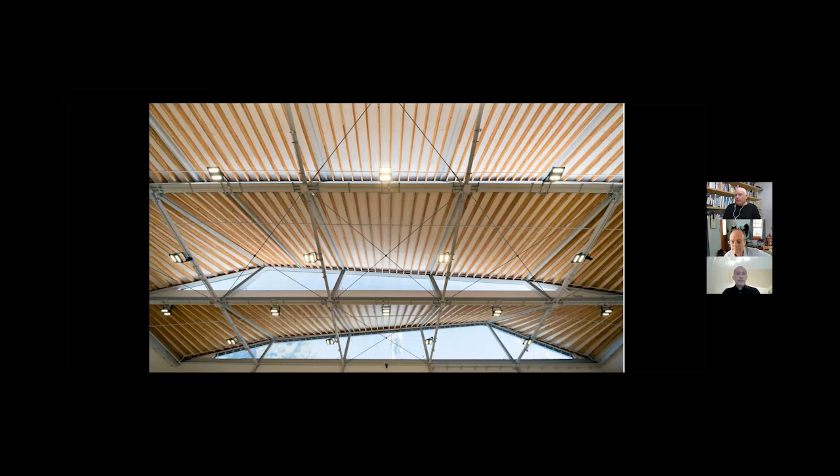We really wanted to absolutely limit the operational requirements for energy to use the building. So you can see these vaults change continuously. It was really important for us to make those out of shaped timber elements. And you can see that in order to contact the top surfaces of each of these joists, it implied a constantly varying curve.

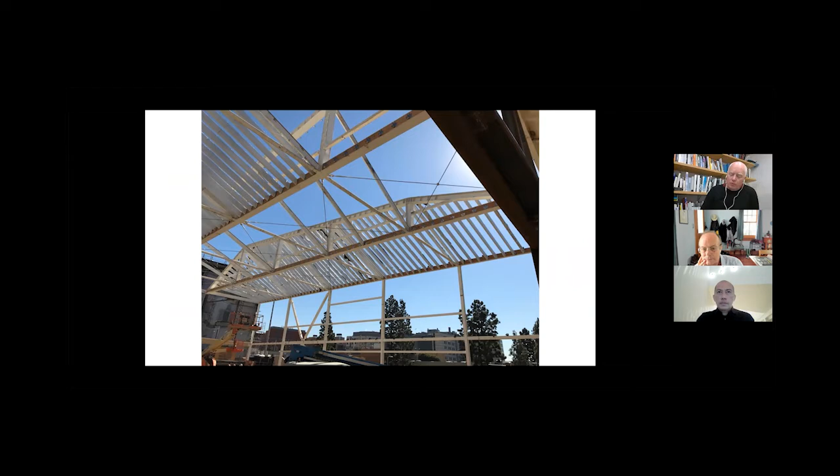And as we started to develop the project, you can see this under construction here, long steel trusses, wood glulam joists that connected them. And I think the thing that for us was interesting, and it was a reminder that in the United States, I think our default technology is carpentry, as opposed to building systems that are fundamentally masonry systems or fundamentally other kinds of systems. I think our default goes back to that Home Depot.

And the skills and capacity that carpentry brings to our work, and the problem solving that goes into any kind of architectural work, I think is really significant. So on one side of the image is engineering details. Thornton Tomasetti did a fantastic job on this project.

On the other side is the whiteboard that, as we went to the job meetings, the subcontractors were really starting to figure out what is going to be involved in making this vault hit the top surface of all these joists throughout the changing course of the vault in its implementation. So let's see here.

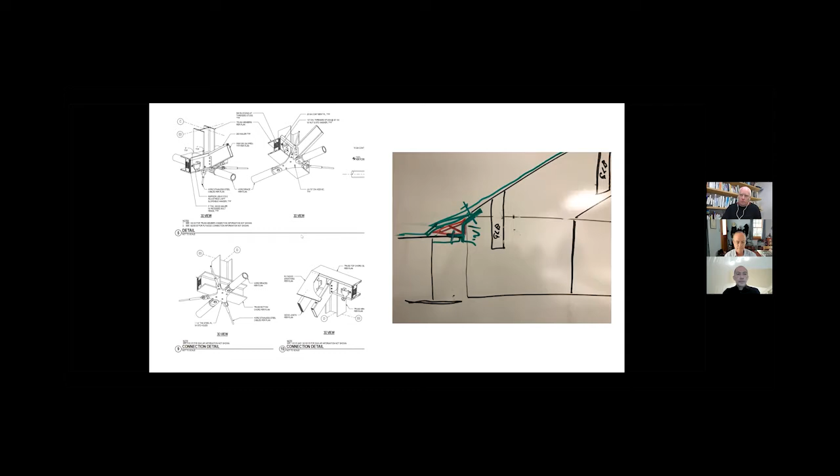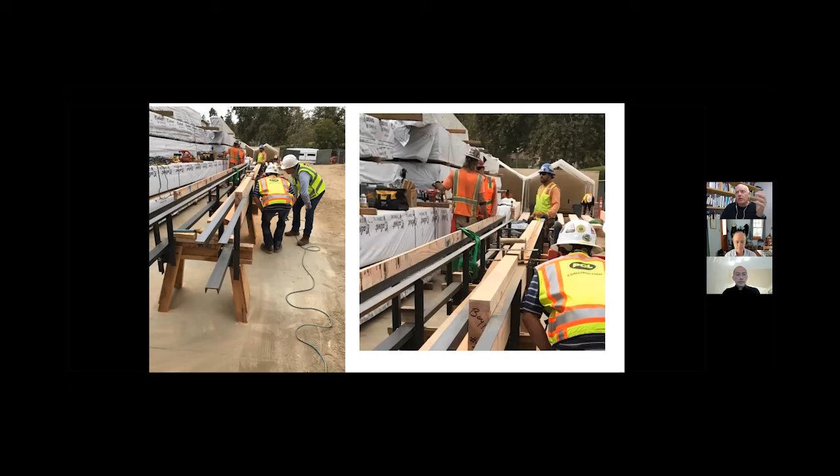So here is the carpenter side of the yard, and I really liked these two images because there was this gap that we tolerated in the start of this project, and that gap really was about the change between the idealization of this and the actual implementation of getting a curved plywood surface onto these joists. And you can see here, these guys are taking a closer look at this tool setup. So there's two things I'd like to point out.

So what the carpenters came up with was a variable jig in order to create this constantly changing top surface on these joists. And you can see in the lower right-hand corner, these bolts allow those two steel angles to change in their orientation with respect to that joist, and allow a slightly varying angle to be cut onto the top of that joist.

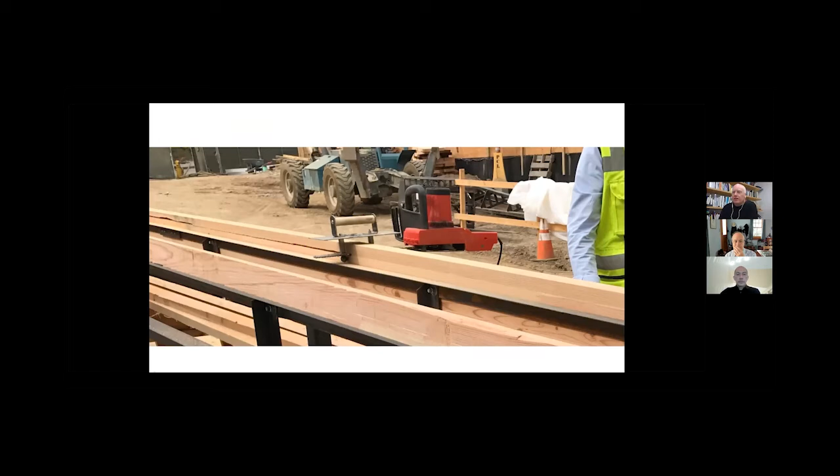And you can see here this red, so here's the adjustability. You can see those two rails operate independently. And here, I really like this thing because what it looks like they did was buy an electric chainsaw at like Lowe's, fitted it with a concrete trowel on the top and bolted it to the bar of the chainsaw, and then let that chainsaw run along those angles.

And you can see this cut starting to happen here, and then that was just cleaned with an electric hand plane. And basically, what we had done was we had extracted an Excel sheet from our documents showing the length and the nature of that taper, and they found a way to provide an analog alternative to that. Even though each of those joists changes really substantially, they developed a jig and a mechanism for allowing that to be fabricated with a single technique.

And I think that's the presence of carpentry within our own construction systems that ended up being a real factor in how we executed this building. So it goes back to this notion of technique as the fundamental source of momentum in construction.

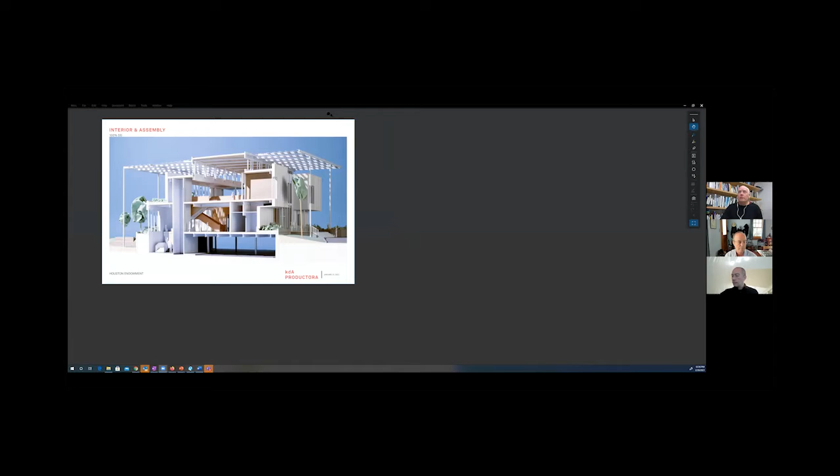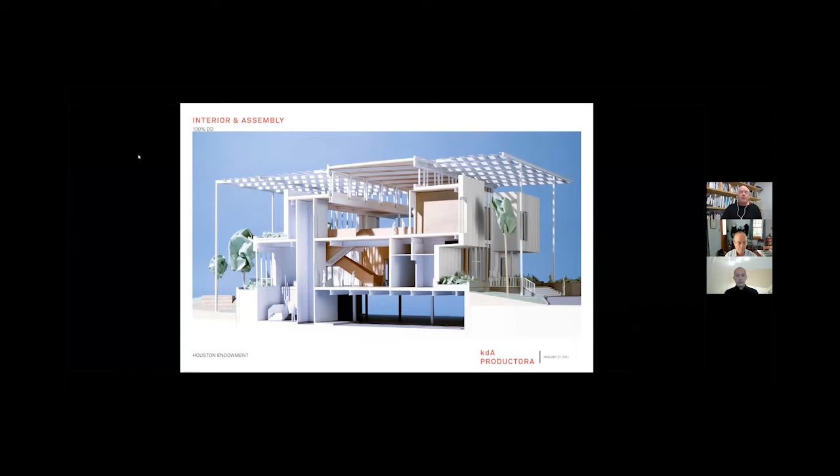So let me see here. Let me go to this second document here. And this is a project that we are just in the process of designing. It's a foundation in Houston, and this project is a competition we're working on with this firm Productora in Mexico City. It started as a concrete building in Houston, and

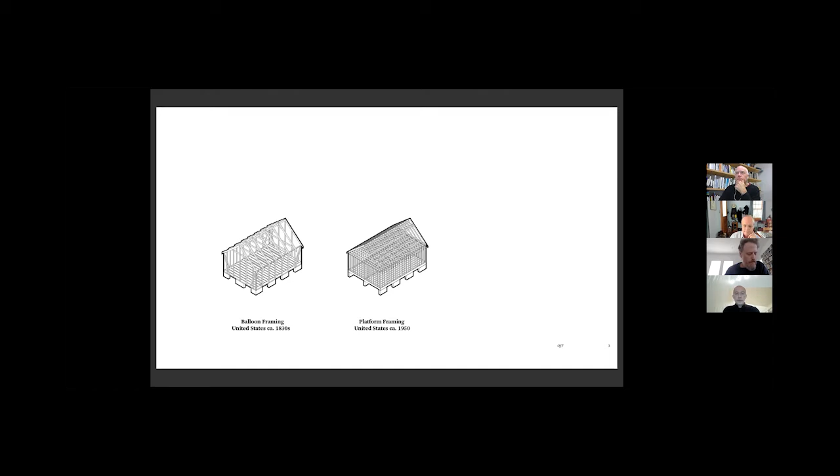Nevertheless, we found within this type there are certain material conventions that we've been able to use to explore important architectural conditions. Our favorite these days is the engineered truss. Nearly ubiquitous in residential and commercial construction, it is surprisingly adaptive when pressed. Two projects of ours look at its malleability as a basis for exploring the conventions around exterior-interior logics, and with that, a more general critique of architectural form. So here's your builder's guide if you're ever interested.

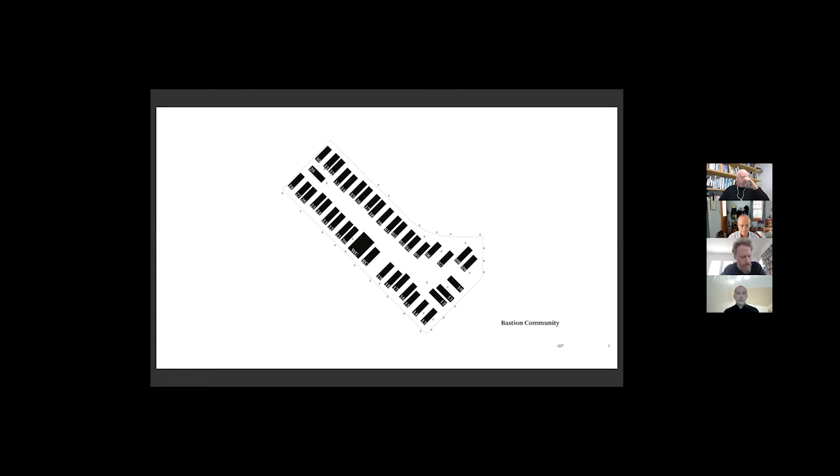The first project I'll start with is Bastion Community. It's a multi-unit affordable housing development comprised of two-family dwellings. There are about 80 units of housing and over 40 individual structures. The architectural premise in this case was to advantage a rigorous adherence to a consistent form. In other words, it's the same building multiplied over and over again. This was, of course, a way to keep costs down.

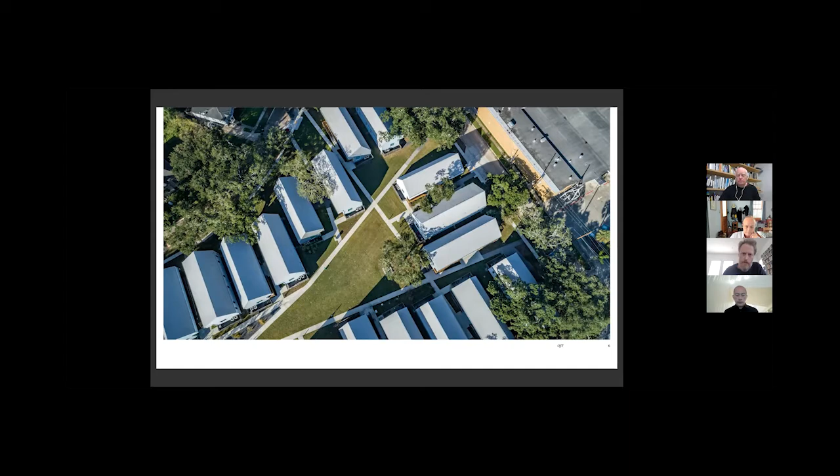But given that there were multiples to work with, we used that to advantage, through manipulation of the site configuration, creating meaningful spatial relationships, defining unit clusters, and specifically scaled social zones. So the real work was how these things were located next to one another. But more important to this conversation is how this attitude extended to the sectional conditions of the units themselves. By modifying the bottom chord of the truss, we were able to create numerous spatial conditions within the unit. Although any two were alike, no two were identical.

So again, it is sort of a poor man's version of manipulating traditional systems that we were impelled to work with here through cost-saving measures, but that's the nature, or as I say, the idiom of this particular construction type. In each of these buildings, we had unique under-chord conditions, basically different room volumes throughout the length of the building itself.

So we were able to add diversity within the structure through the simple manipulation of the truss form. Anyone who's worked with engineered trusses knows the manufacturer doesn't really care what shape it is. They just want it to work structurally. If you understand that as a precondition, then it's just up to your imagination to work through and make use of it.

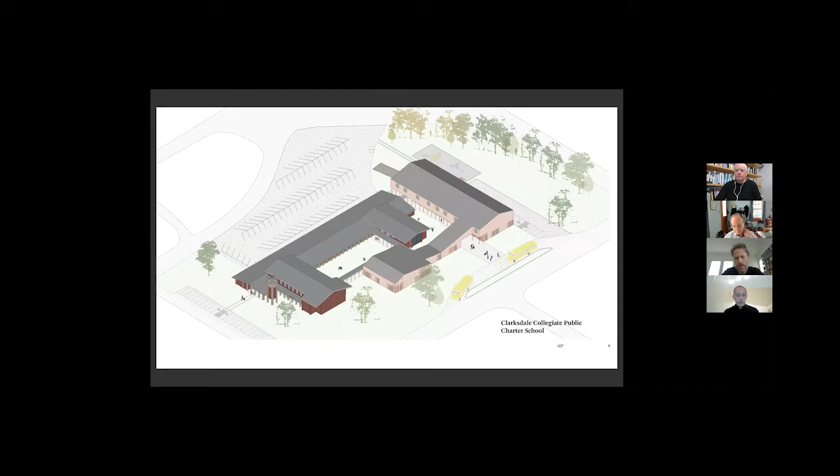A second project to walk through quickly was a school we've been working on in Clarksdale, Mississippi, that involved an existing church and the construction of a new building adjacent to it. It's an addition, but it's unattached. We needed to work the new building with the massing and form of the existing building so that the two intermingled, by client directive, so that we could respect the existing structure. It had its own monumental spaces that we wanted to make sure were still present, and the school itself had its own monumental spaces that needed to interweave with that.

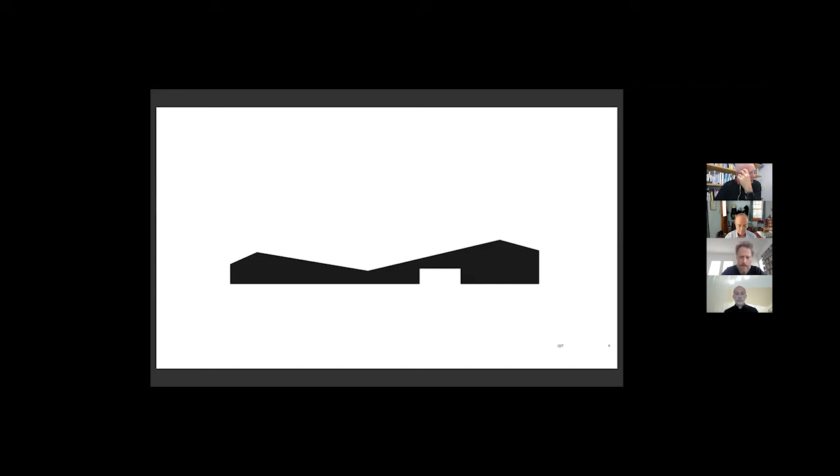So in this case, what we ended up with was creating this kind of clear silhouette that intended to obscure the scale of the structure using a playful, intentionally slopey and residential overall form. But behind that silhouette was a complex of rooms, each with specific spatial necessities.

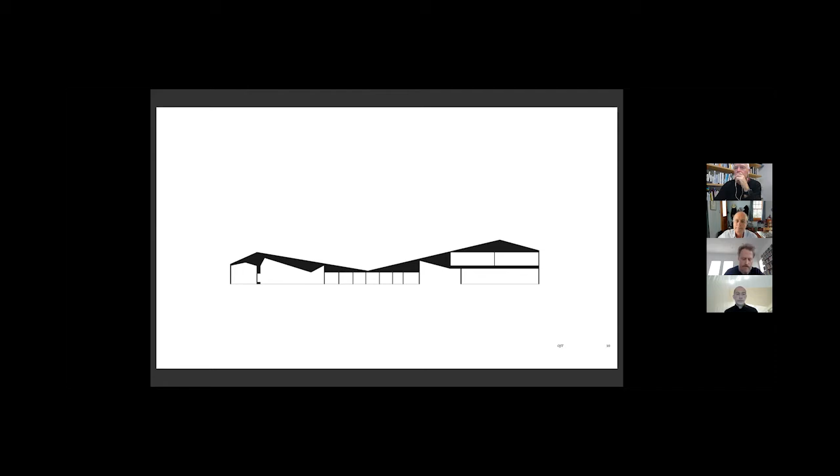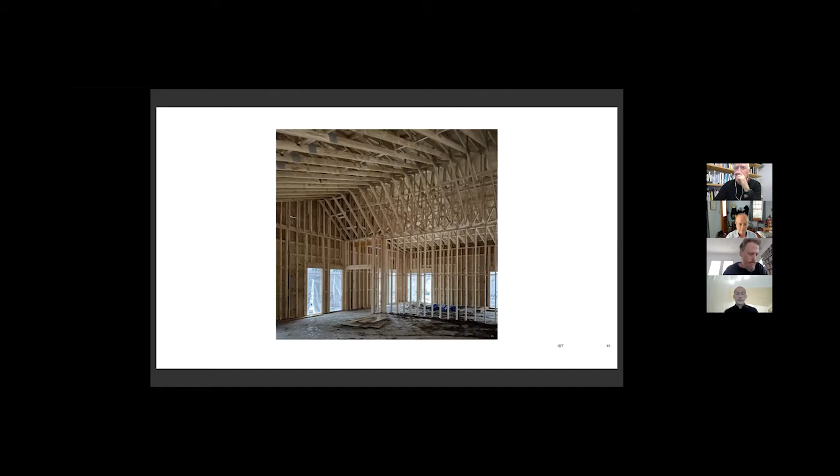And so this is it under construction, and I think we all as architects appreciate the sort of repetition and the character and depth that we get whenever we're on these job sites around this condition. And so this one, again, expressive of that particular form. But back to the idea of conventional framing.

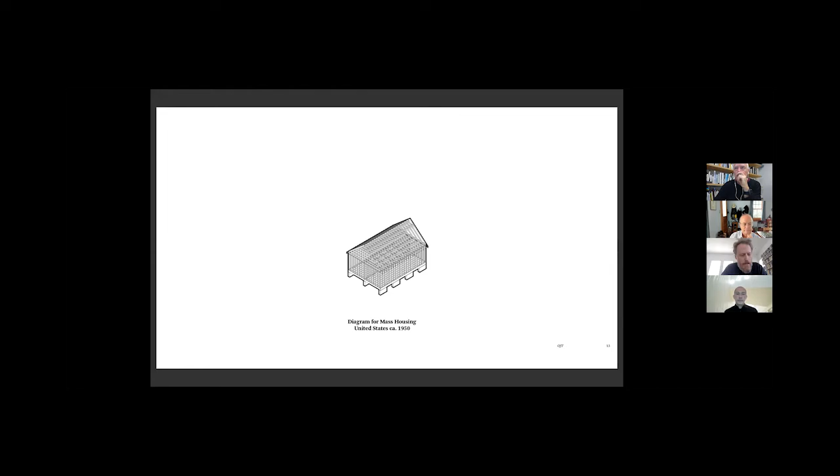The modernization of framing technique was also importantly a prerequisite for the mass construction of post-war housing. So the idea of platform framing came about at the time that we've had a post-war boom and consequently suburbanization of housing in America. And another construction type used for mass housing predated this and should also be a familiar typology to the audience. In this case, the concrete or commercial construction for your typical multifamily housing developments.

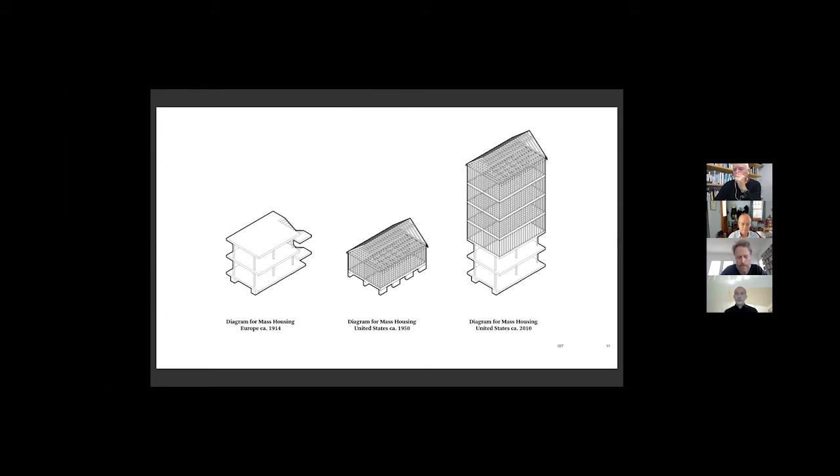But recently, what's of great interest to our office is how the melding of these two has created, in our opinion, the most nefarious typology for housing today. There's a lot to dissect here and no time to do it, but in the context of construction type and the use or advanced use of wood, I think what we refer to as the 4/2 typology deserves consideration. And by this, we say pound over pound, but it's number over number, 4/2.

And what that is essentially is the advent of incongruity of the building code, allowing the combination of non-combustible, that is the plinth, with combustible framing, which is the stick-built part, that creates this new housing typology. And there's a fascinating history here in which it evolved out of the Northeast, making its way into the international building codes. But along the way, at least in our experience, it's been firmly rooted in the lexicon of most developer and real estate entities in the country.

And this is what we're talking about, typical plinth in this case, where you might have parking or commercial on the ground floor, and then your double loaded housing units on the top floor. But one reason that it's ubiquitous is that it's ruthlessly efficient at neatly addressing the mixed use, mid-scale urbanity found in most American cities.

Commercial retail combined with parking topped by layers of repetitive housing, making it the building block of renewal and infill urban development. Another reason is it's cheap, the wood part anyways. Consequently, it is ubiquitous and as a result is reshaping, I'd argue homogenizing, our cities. And these are examples that you'd see in different parts of the country.

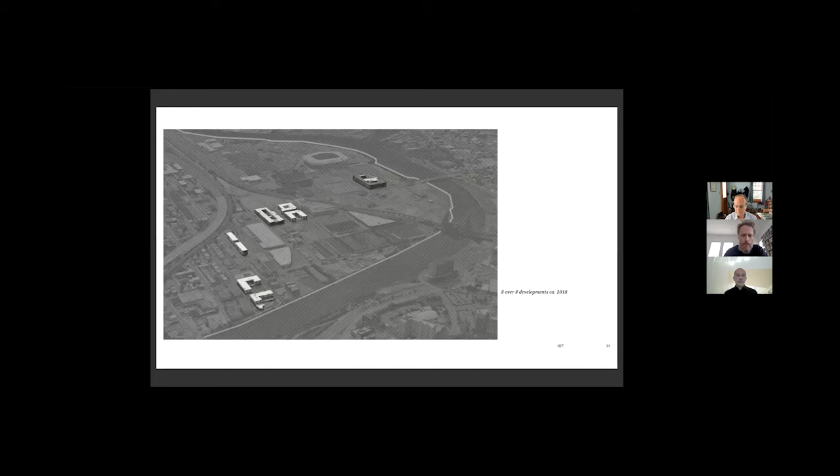But to illustrate, we were asked some time ago as part of an ongoing planning project in Newark, New Jersey, to evaluate its deployment in the adjoining city of Harrison, New Jersey. This is a classic case of post-industrial land reprised as TOD development sites pivoting off of the proximate PATH station. This is at the time, 2018, these were the current 4/2 developments, and then these were all platted as new 4/2 developments that were coming up in the subsequent years.

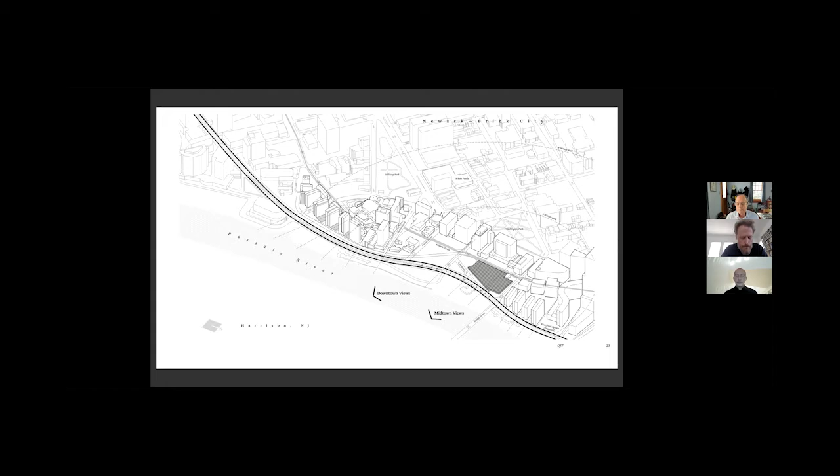But as part of this study, we were also asked to consider the potential reuse of a large downtown parking garage and adjacent multi-story building in downtown Newark. Since we were already immersed in the conceptual framing of this building type, the garage presented an excellent opportunity. Here we had our plinth, so we were free to use the top, the wood frame portion, at our whim to express programmatic and formal potentials within this typology. Free to an extent anyways.

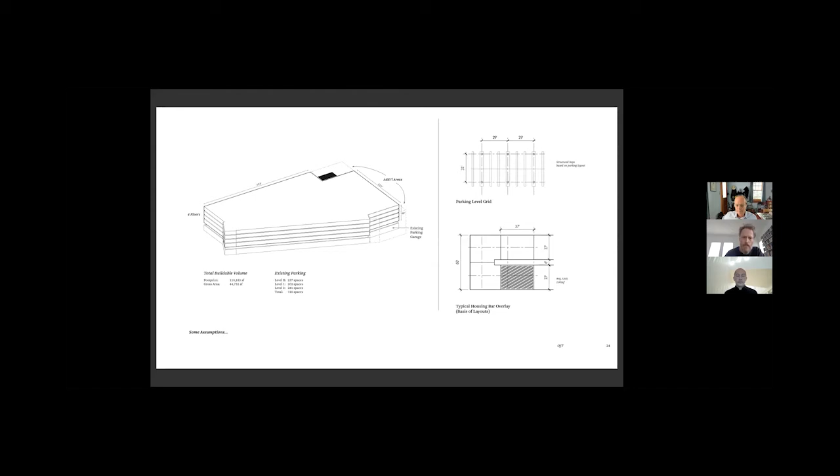This is the garage. This was our overly obsessive analysis of it, looking at how parking and the structure of parking actually permits or facilitates the housing development and the actual circulation patterns above it.

You can see the obsessiveness here as we were sort of digging into this, but we were free to an extent anyways, as there are rules to housing. The 60-foot bar, building width of a double loaded corridor housing plate is also one of these ubiquitous terms that we're always running into, but that's the rule to follow.

And with that, we went about exploring expressions of the construction and formal conventions. So this was the existing deck, and then our approach to how you put the top or the housing block on top of that. And then through that, a series of analysis about what that form should be. Again, this was our chance to at least challenge to the best of our ability what this new typology represented urbanistically, but how the relationships between the two material types specifically could be differentiated or expressed in different ways to address either internal logics with the building itself or externalities in the urban environment in this case.

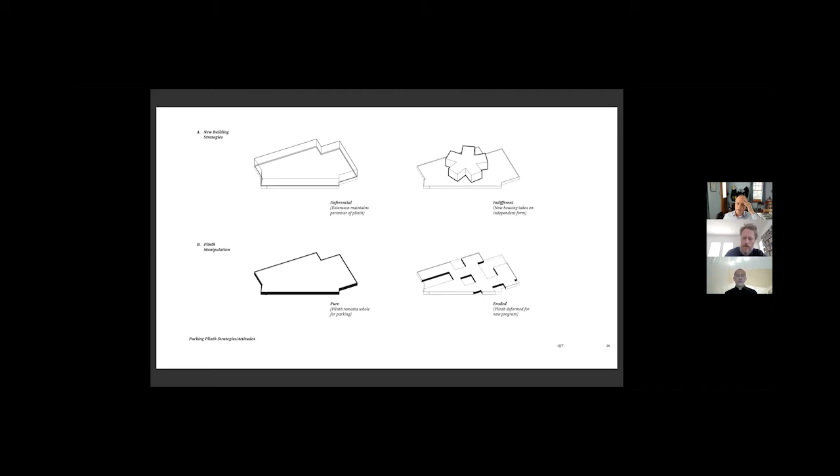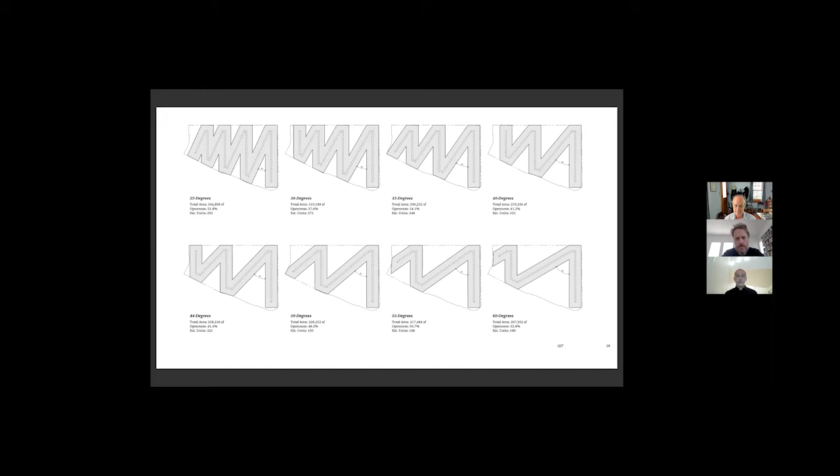And so this is, again, a series of iterations where we work through what were opportunities on this particular platform. And this is us just having fun with different formal types, again, using the 60-foot bar as a premise. So that dashed line being the corridor for double loaded layout. And then through, again, a series of obsessions over slight modifications and how these modifications created either efficiencies or economies and maximized densities on this particular platform.

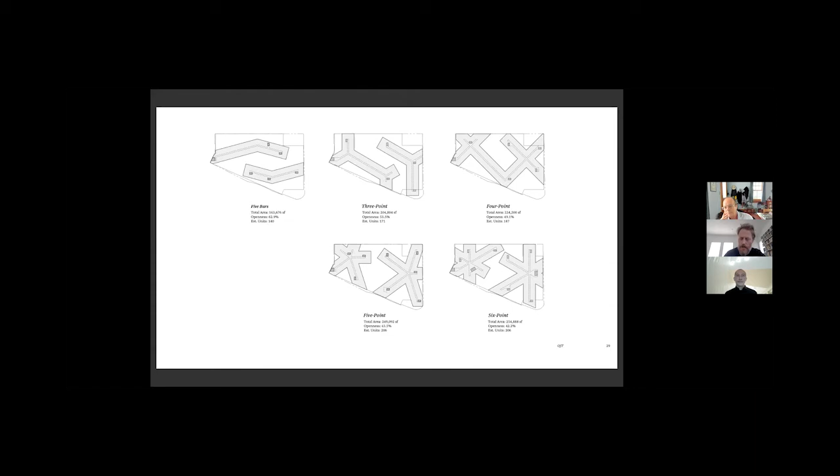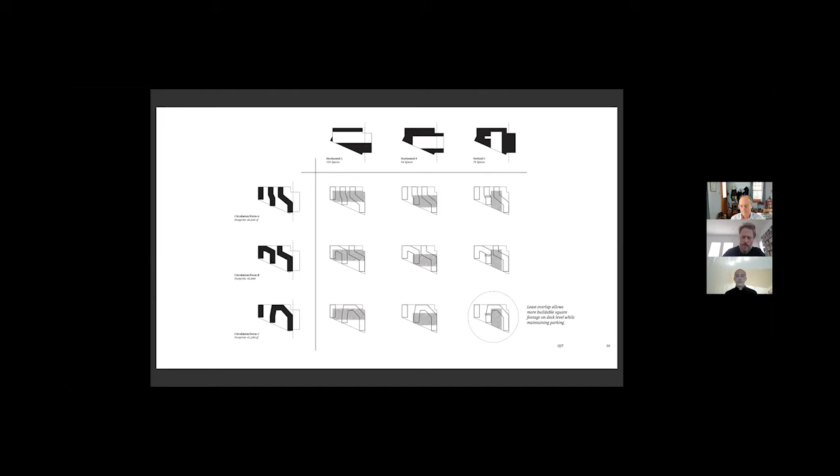And then through another series of locations of circulation cores and types in association with the parking below in order to create pinwheel configurations and other assemblages on top. And then another series of layouts about how these things work and overlap. And again, in spite of the exuberance, let's say, of the form, we were looking for ruthless efficiencies and economies in the structure type that we were working through. And consequently, this was the net result of us working through that analysis.

Can't say that we necessarily solved or came up with anything inventive in this case, but the point is that we were trying to investigate or challenge this as a type and as a new form and as an important building block, if you will, of urban development. But to be clear, wood in this case isn't an exact technological advancement. It's regular old framing. There's nothing new about it in some ways. But its co-option is creating new urban forms, as I said, but whether for good or for ill, if not for wood, I don't know that it would be the same.

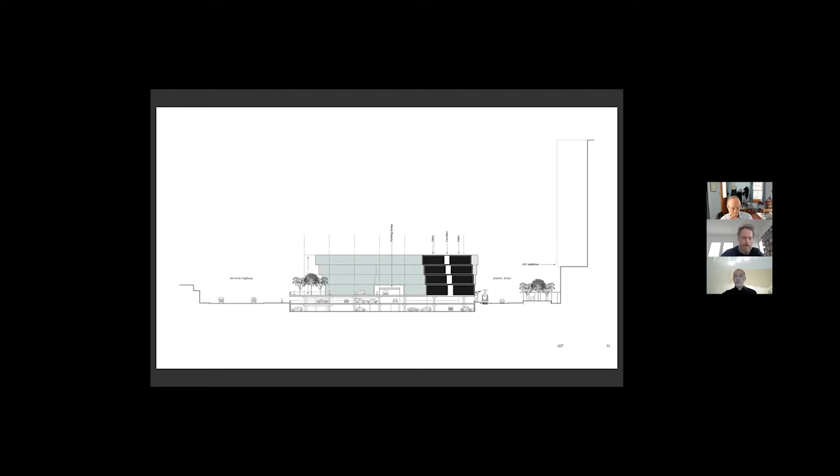With that, I'll end this presentation by circling back to the passage where I began. I know advancements in wood are critical discussions these days, certainly for the symposium, but within this discussion, I'll offer that the ubiquitous or primitive vernacular, if you will, is still ripe for invention. Okay, so I will cede my time.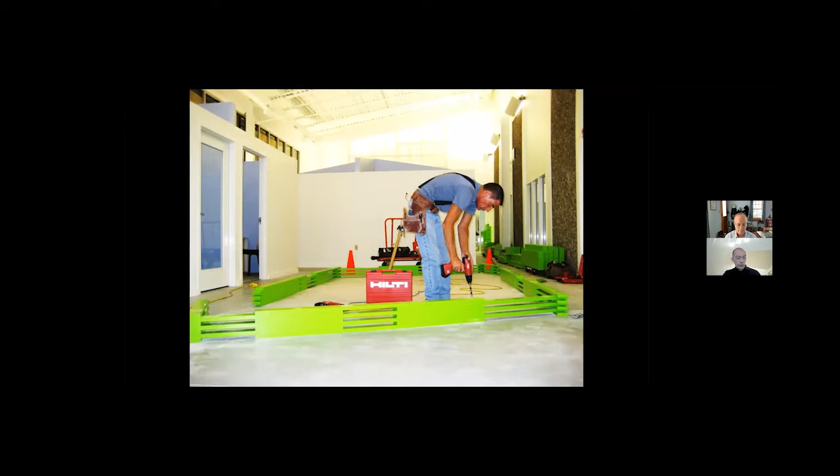One key challenge of this project was that during its construction, the facility could not be shut down. Mail had to continue to be processed. And so this was built during evening hours by only one person, using a series of jigs to slowly stack and attach the planks. And this is an important aspect of how we think about our projects, which is that even though it may look complex, it can actually be constructed quite easily and economically. So this is the resulting conference space. And again, the vertical bands of opacity creating a structural load diagram pattern.

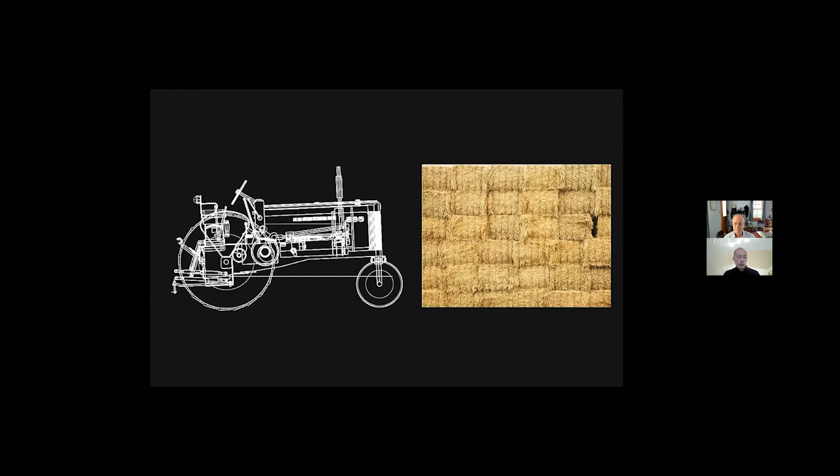Just as United Mail was finishing up, we began work on the Mason Lane Farm operations facility. And I'm going to focus really on only one of the barn structures by which this project is probably best known. The program is pretty simple. It's a covered structure to store large-scale farm equipment and also to store and dry square-baled hay. And of course, in our region, tobacco drying barns are a very familiar sight. And we looked at these kinds of precedents as our starting point.

We were also interested in a material parallel in terms of the hay being stored inside and its relationship to grasses and to a local bamboo called Kentucky cane, which is essentially an invasive weed. We thought about using bamboo as a primary cladding material, detailed to provide some coverage from rain, but still allowing breezes to flow through the structure so that the hay could dry. By coincidence, we were fortunate to have a bamboo grower only 35 miles from the project site.

I should mention at the time this project was being undertaken, we were pursuing LEED certification. And this project in a way was sort of critiquing LEED criteria at the time and looking at proving in a sense that you could build both sustainably and economically by using primarily passive strategies. And so the bamboo cladding was harvested fresh and brought to the site. This was constructed during the wintertime.

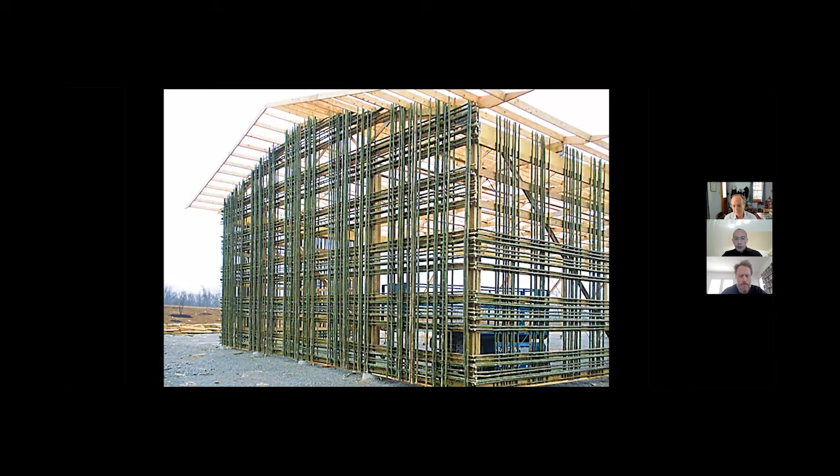And these are images of the facade installation. It's a little bit blurry here. But there was kind of a nice poetic material moment in that the bamboo facade actually turned from green to gold, just like the hay that was being dried inside. And so this is the completed project. And then a view of a micro detail of the twisted wire ties that were left extended to form a secondary texture in the facade.

Our affinity for barn structures came into play again when we were asked to design a visitor center for Wild Turkey Bourbon, who were in the process of rebranding or refreshing the brand at the time. And certainly we were inspired by this incredible site. The building site sits on a promontory overlooking the Kentucky River. Of course, the whole history of bourbon making and the rick houses used to store the bourbon barrels, the many pitch, tar, black covered tobacco barns that you see approaching this distillery. There was actually a family of wild turkeys that live on Turkey Hill, which is the project site. And then even the black fungus that covers buildings within the Bourbon Trail area, which feeds on the bourbon distillates.

And so this project was an opportunity for us to reinvent an identity, again, something that was both familiar and new. We used the iconic barn form and developed a series of cladding details to abstractly allude to things like the turkey plumage, the quilt patterns, and so on, but also to relate to the vast range of scales that we were looking at in terms of the scale of the distillery landscape and the more intimate scale of the visitor. So this is a building that reveals itself as you get closer to it. It also opens up towards views of the Kentucky River. Again, I mentioned that this is the source water for the bourbon.

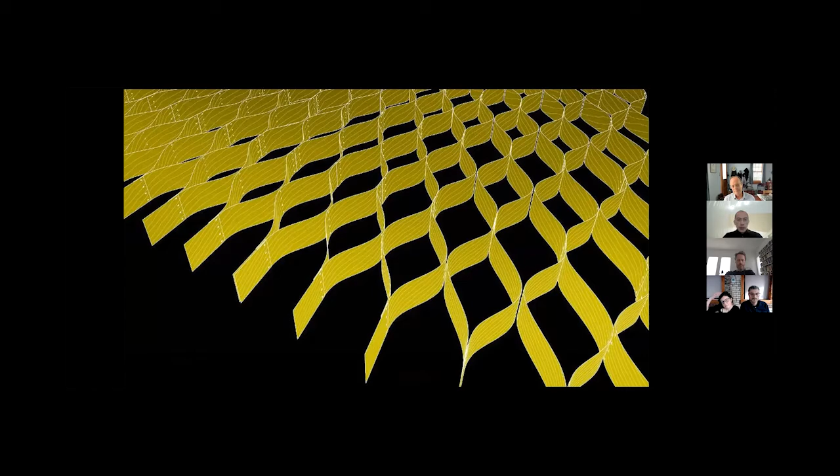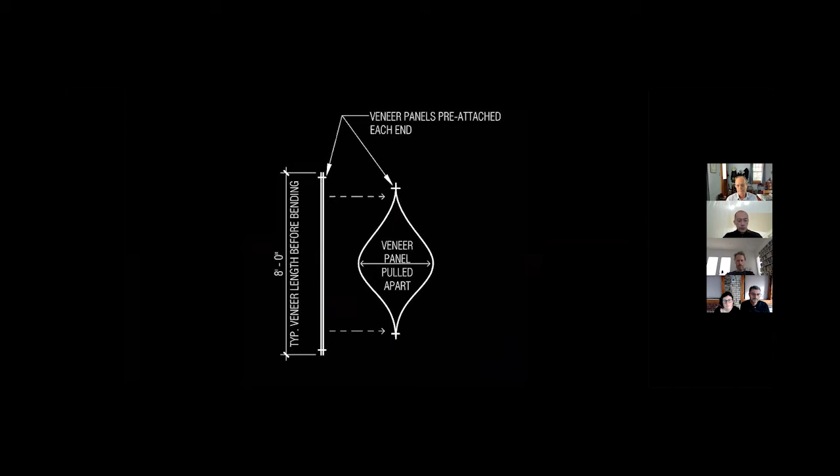On one of our more recent projects, a new event and archival facility on the Filson Historical Society campus, which is in Louisville, we were inspired by the historical detailing found in the Beaux-Arts structure on the property and reinterpreted these elements in wood, as well as referencing river and water motifs. It speaks to the focus of the Filson organization, which is to archive and share the story of the Ohio River Valley area. So the building itself is designed as a layered structure, deliberately emphasizing the way that we build today with brick cavity and veneered and layered construction.

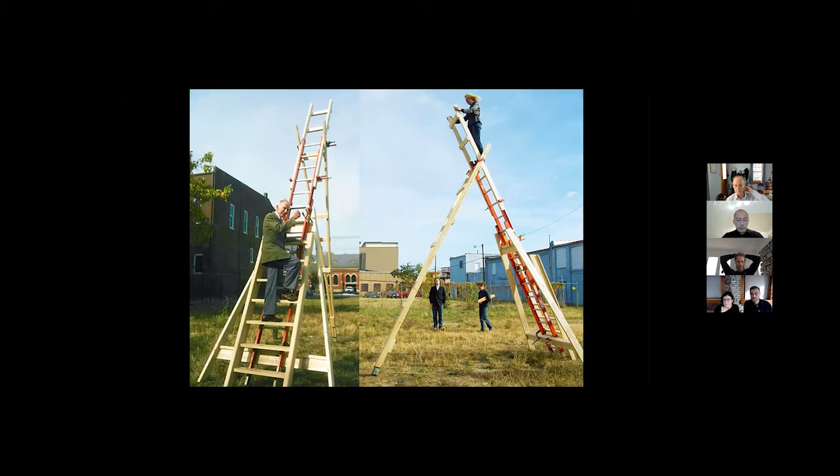And so we rigged up a full-scale prototype to see how tall this would be, and also how high the client was comfortable climbing up. So this is him on the left giving a thumbs up.

And we continued this collaboration throughout the entire fabrication process, including steam bending the wood, profiling the handrails specific to the client's hands or grip. We actually made a clay mold to get this profile, and then testing the steel components for weight and stability.

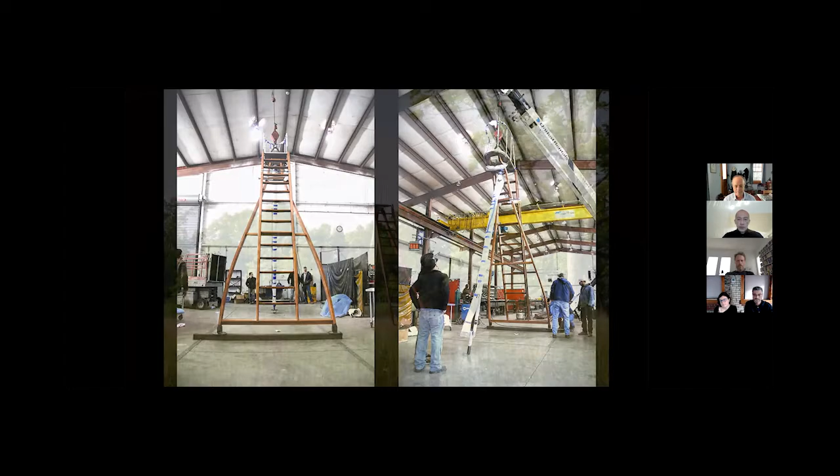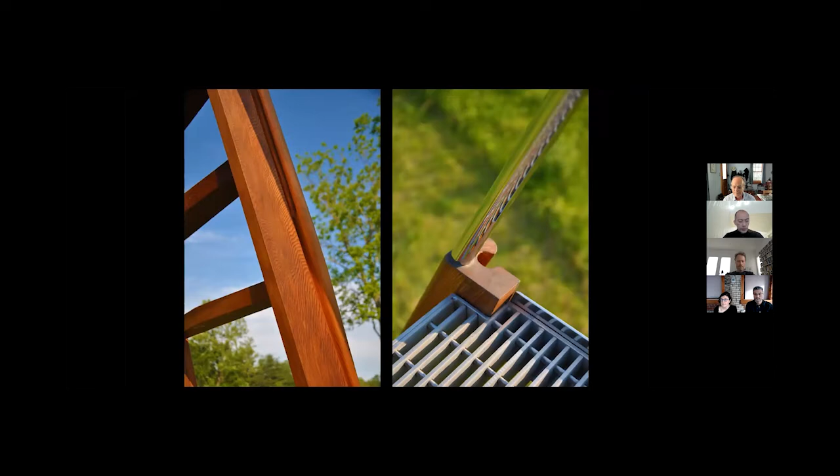And the image on the left, again, you can see the handrail that's profiled to the client's hand for the grip. And on the right, the termination of this, again, the fusing or the grafting together of wood and steel. And this is the hinge or the pivot point at the top.

The ground anchors are actually just mobile home tie-down augers to facilitate easy moving of the structure. Again, this project is intended to be moved around seasonally to different viewing locations. And the final image showing the relationship of the structure to the earthwork.

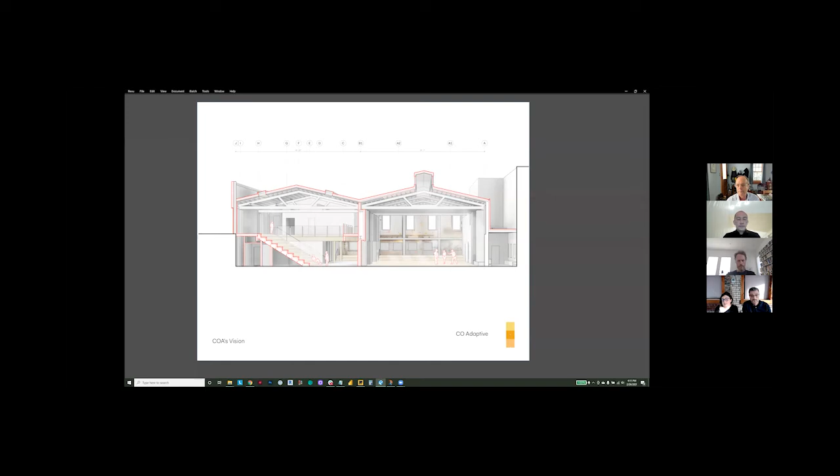His objectives also included the desire to understand the wayfinding upon entry, which is very counter to the current state of rooms and hallways, and to be authentic to the building's character and inherent qualities. With this, CO Adaptive set out to restore the character of this heavy timber building, exposing and honoring the beautiful wood trusses and articulating the double A-frame, whilst adapting the building to meet the new programmatic function.

To accomplish the owner's vision and our design goals, the building needed to maintain its heavy timber construction classification. And because we weren't increasing the floor area, we were actually decreasing it, we could file the project under one of the older codes for existing buildings.

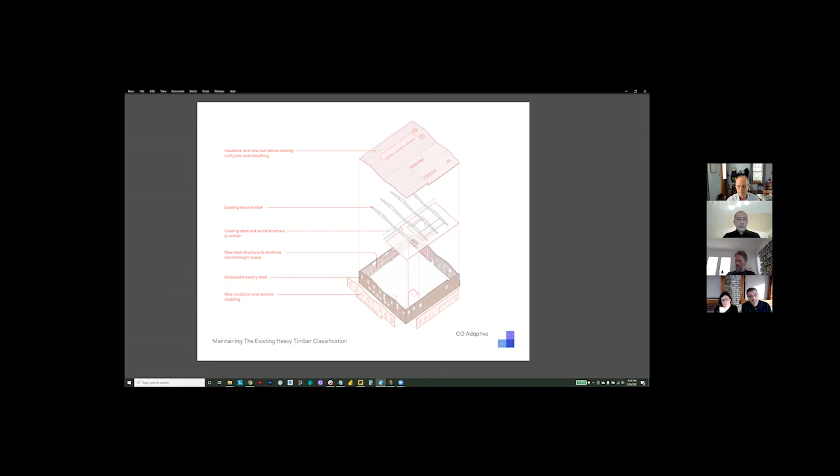To celebrate the wood and the masonry character of the building's interior, we chose to insulate the building from the exterior. This allowed us to expose the existing material's warmth, texture, and history of use. We even left intact the construction spray paint annotations as part of that history. This really reduced the need for interior finishes significantly, reducing the amount of drywall and paints that a project of this scale would typically have.

The large studio especially embodies the vision of the owner. This is the primary theatrical space, which can be configured to be two smaller studios by closing large, heavy Hufcor doors in the center, or to become one large open space that is light-filled and airy. We removed the interstitial floor slab on one half of the A-frame and created a 25-foot ceiling height.

The existing clerestory was restored, and all the existing masonry openings, some of which had previously been reduced in size or infilled, were reinstated to maximize natural daylight throughout. The exposed wood trusses and timber joists are read for the entire width and length of the structure, and other than some cleaning, were left completely untouched.

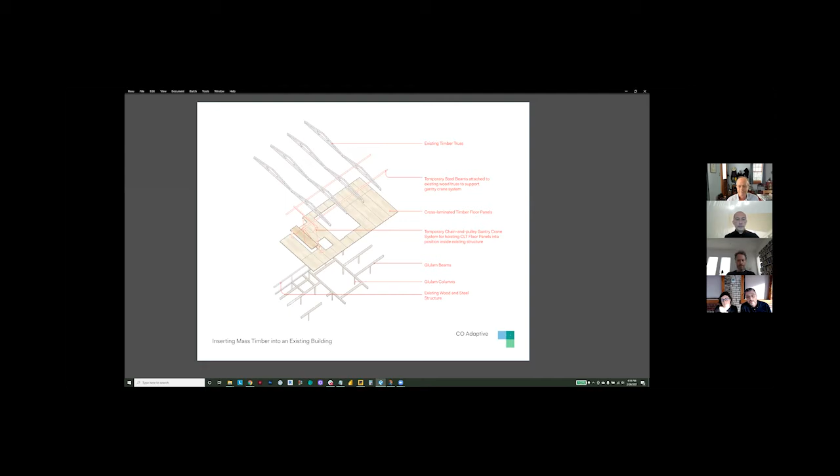On the opposite side of the building, the required layout changes necessitated that more than 75% of the existing first floor be removed. So we looked at a mostly new column and beam grid. Because the existing roof trusses needed to remain in place, we looked at what kind of innovative solutions we could get to put CLT into an existing building. So using the existing timber structure to support a gantry crane, the timber structure was slid into place from the side of the building.

It was supported back to the underside of the wood trusses above. And then a Bobcat was used to remove the existing wood decking. The joists and beams and columns were then carefully removed and stored for reuse.

This was the GC's first time installing mass timber. They had done several theatrical projects before, but they ended up bringing a third party in to help coordinate the effort. I should note that the glulam and the CLT came from different manufacturers. The glulams are from Art Massif in Quebec, and the CLT is from Nordic.

It was such a small order compared to most CLT projects that they were able to bundle it into what I believe was an Army project that they were delivering. So it was able to come on that shipment, and that expedited the delivery time and the costs.

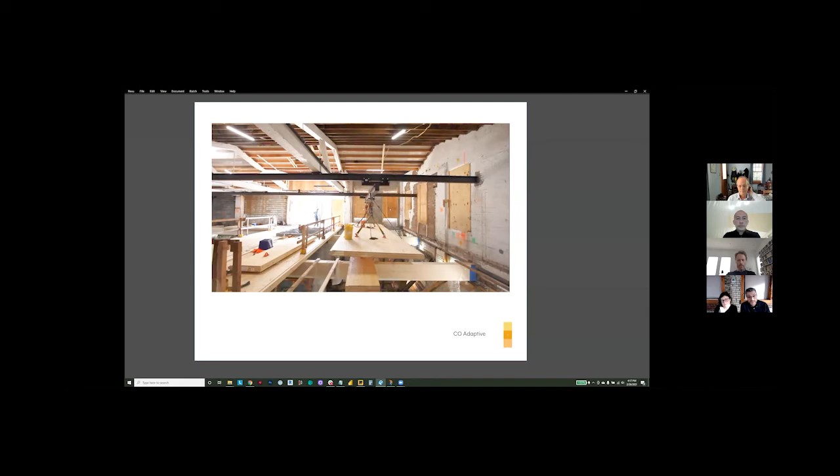We had 13 panels in total. Again, it was a really small order. The GC was able to do about 2 to 3 panels per day, so it took approximately 1 week for the installation of the CLT. Another benefit of being installed in an existing enclosed building was that the timber was protected from the elements the entire time.

So working with CLT allowed us to have large column spans and therefore an open layout that worked well with our programmatic requirements. And the systems are all exposed on the underside of the CLT. This required careful planning of all the sprinkler runs, HVAC ductwork, and electrical conduit, but resulted in a very honest and clean expression of the infrastructure within the building.

Working with timber also allowed us to embed lighting. This was a detail that was pre-carved into the glulams off-site. And we chose to express the CLT sandwich with our railing design so that you read it as you're walking down the stairs or sitting on the bleachers.

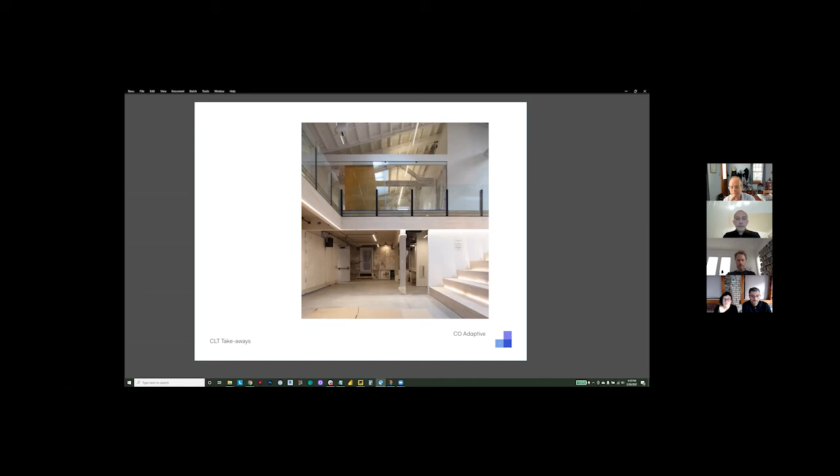The building's existing material palette becomes a very primary part of the interior. So in addition to the elements that were retained or exposed, we carefully salvaged the existing industrial doors to be used within the existing layout. The orange door you see in this image was hung from a new track and separates the administrative offices from the main entry and circulation spaces.

The existing structural lumber that was removed in creating our double height space and inserting our CLT atrium floor slab appears to be longleaf pine, dating back to at least the early 20th century. Everything that was removed was stored on site and cut down in place. Existing paint finishes were flaked off, but largely retained and encapsulated in a matte clear coat, and were used for the guardrail of our atrium opening.

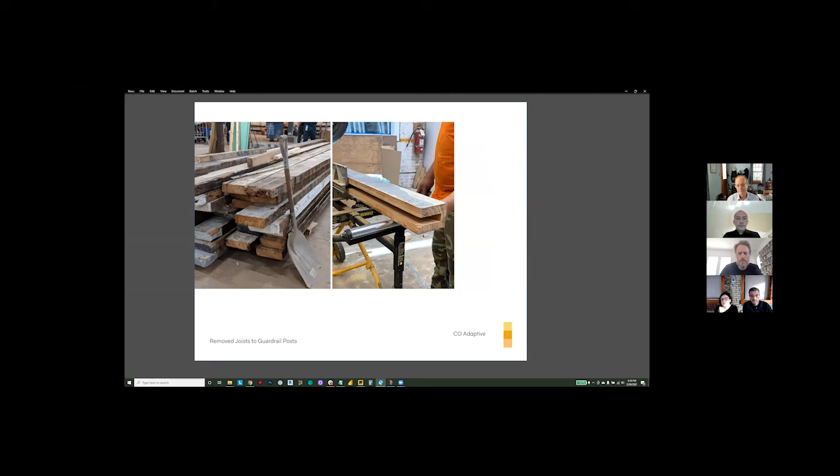The wood encapsulated a steel member that provides the structural integrity, and along with the clear glass allows the guardrail posts to remain in keeping with the language of the heavy timber in the building, and all the focus to remain on the wood. We also used the existing lumber as separation elements between the microperforated acoustic panels in the main studio. Acoustic separation and absorption was critical in this big open space, and using repurposed material here allowed us to add rhythm and texture to the large wall in the main studio.

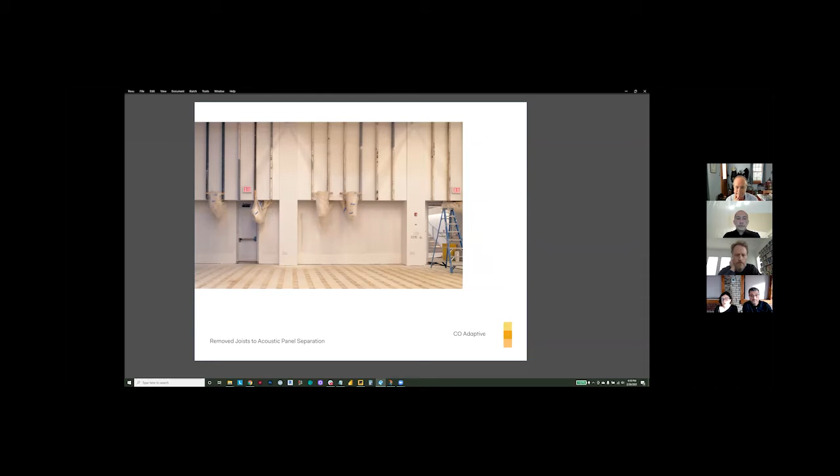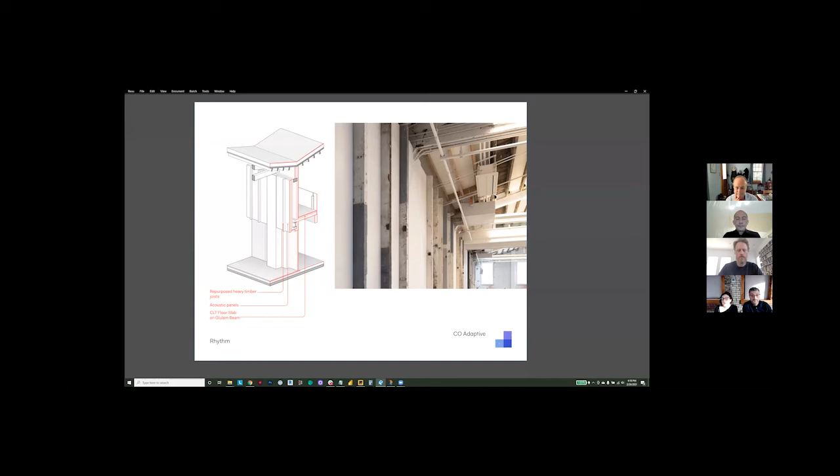This additionally met our goals of reducing construction waste and maximizing the life cycle of the existing wood already in the building, thereby lessening the carbon footprint. Everything that was not used on our project itself was given to Sawkill, a wood flooring and paneling company in Brooklyn that specializes in reintroducing locally sourced reclaimed wood.

Since this building is in a very low-lying area, like I described, and it's unfortunately prone to water infiltration, we designed a dance subfloor system for the double height studio space that can be disassembled, protected, and reassembled in the space in case of a flood event. Wood, again, was the best choice for its weight, economy, and impact absorption for dancing.

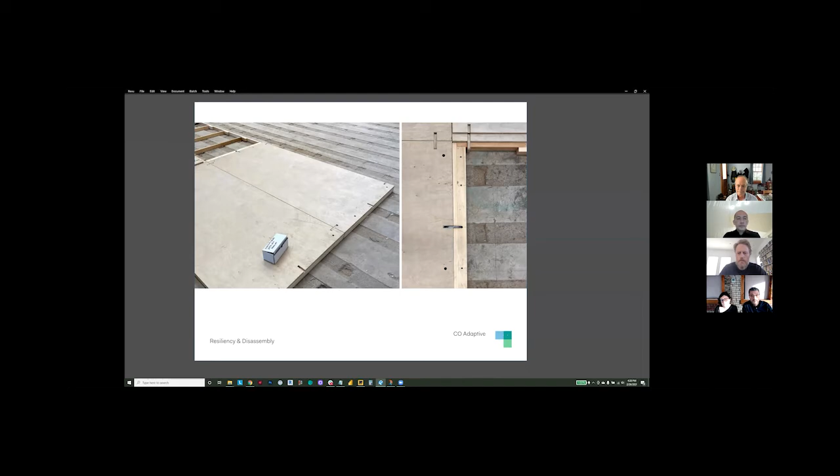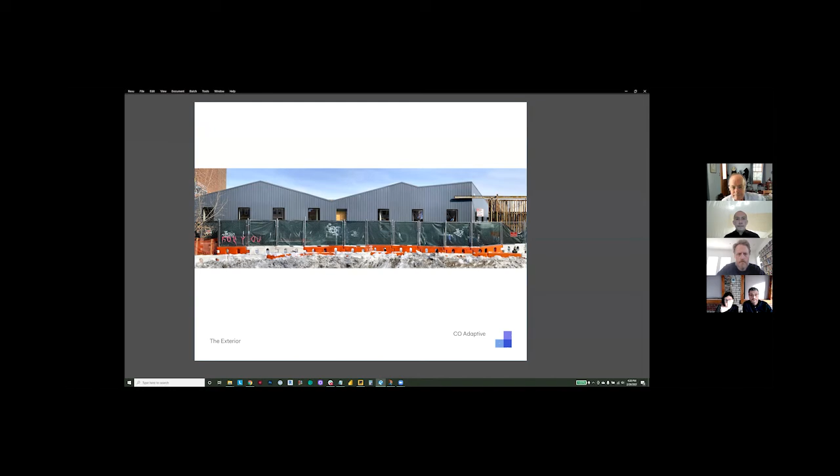So ending on a few slides of what the building looks like right now. This is it from the exterior, insulated and clad. A shot of the double height space as it is right now, showcasing the movable acoustic doors. A shot from the entry looking toward the administrative space. And a view from below the CLT slab looking towards the bleacher stairs. This space is to be used as informal gathering space where artists using the different studio spaces can mingle between rehearsals.

And since we are sort of working on the fourth iteration of the use of this building, we have been asking ourselves what it might become in the future. And by extension, how adaptable is the mass timber that we inserted? How might that look in its fifth iteration?

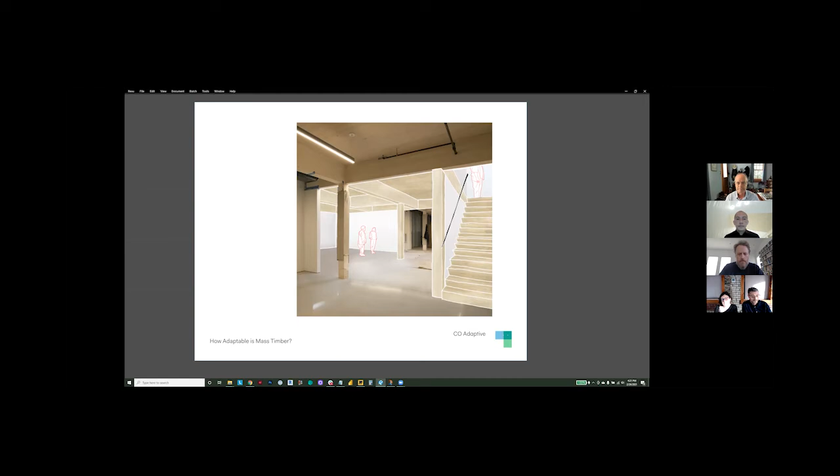Okay, can you hear me? Yep. Great, okay, good. And does the screen look legible? Yep, looks great. Great, great, okay.

My name is Z Smith. I'm a principal at Eskew Dumez Ripple. The title of our session is Chopping Down Barriers to Wood Construction, and I'll try to talk a little bit about why we've headed in this way.

So we are a 50-person architecture, interiors, and urban design firm based in New Orleans. And about 9 years ago, I guess, we started an in-house research fellowship program. And that fellowship program was because there are all these questions that we would like to go further in our practice than we can ever tear ourselves away from ongoing projects to examine. And so it's kind of a force multiplier.

We invite typically recent graduates, people usually within around 3 years of graduation, to come and be embedded in our firm for either 3 months or 12 months or a mix of both. And we pick a theme each year. It's a little bit like This American Life. And then we just say, go find out as much as you can, ask questions, talk to academics.

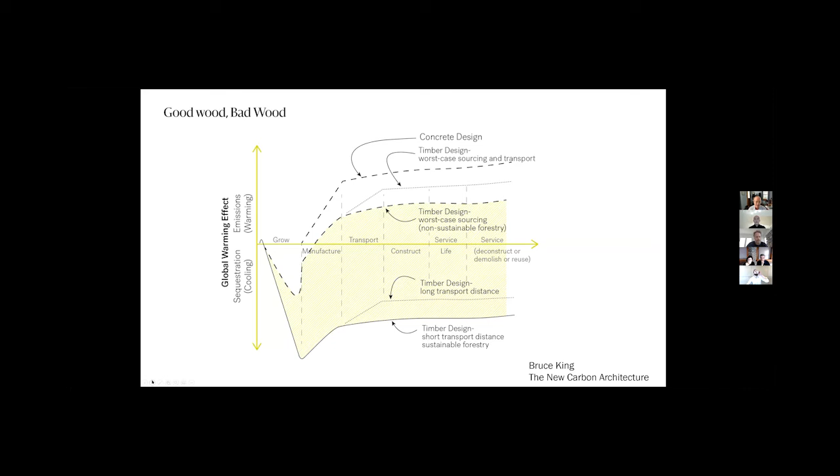And then when we harvest, depending on how we harvest it, how we kiln dry it, how we transport it, and then how well we use it, the net carbon impact of wood can be less than the worst case of, say, a heavy concrete building, but it's remarkably sometimes not that much less, depending on the quality of the forestry and what happened to the forest afterwards. And so developing a set of tools to help us track and understand that is going to be key in advancing and increasing the scope of wood construction in architecture for it to have the carbon negative role that it can have if we do it right.

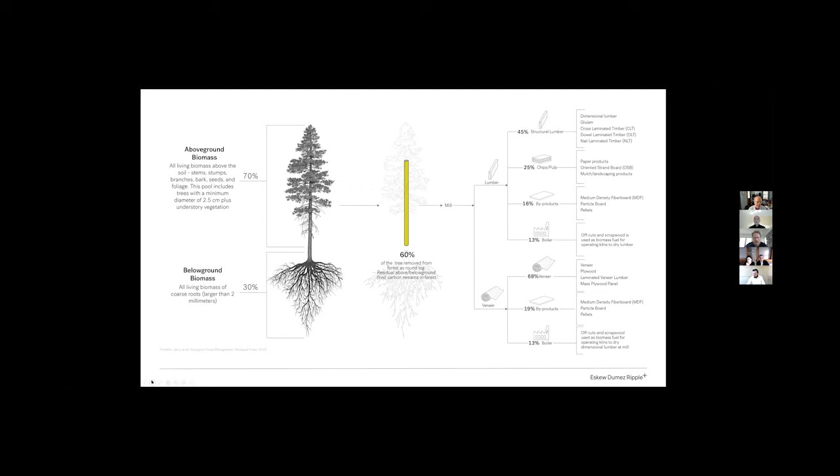That's sort of illustrated here through these beautiful diagrams that Brennan assembled, showing that somewhere between 30 and 50% of the biomass of a tree is actually below the ground. And then we take the shaft and then we mill it and so on, and then slice it and dice it and put it into other wood products. So understanding the flows and how much carbon is really getting locked into the buildings when we're done is sort of a key way forward.

And so if we well manage a forest, the idea here is that if we can harvest a little bit, sort of 2 acres out of 100 each year in each stand, we can preserve the forest integrity, sweep through on a 50-year time scale, and take that carbon dioxide that's been locked in as carbon and cellulose in the trees and put it inside a beautiful building and a nice safe place where we can keep an eye on it.

And as we do more and more of that, by substituting for the use of concrete and steel, we can use the act of construction and the act of sustainable forestry as an act of basically locking more and more carbon that's currently in the air inside our buildings and helping to lower the CO2 levels that have already been elevated through industrial activity.

So how can we lower the barrier for use of this? Because early demonstration projects with mass timber buildings have often shown that there's a $10, $20, $30, $40 a square foot premium in structure. And it is the structure that's the majority of the carbon impact of new construction. So we've been interested in what we call inside EDR gateway drugs to the use of mass timber.

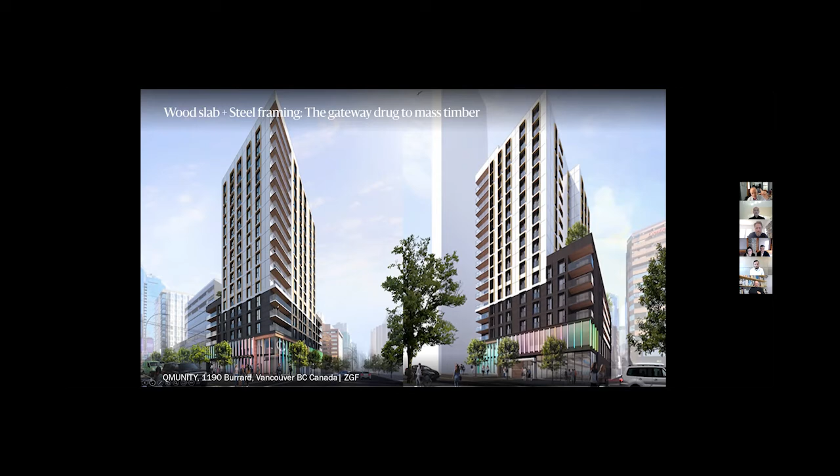And this approach is again helping reduce the cost difference between this and what is for Vancouver conventional construction for high-rise residential, which is to say concrete. So we've been applying that ourselves, and we actually have a couple of projects we've been doing deeper dives on. And this is looking at the carbon impact, not counting any of that carbon getting locked into the wood, but just the fact that wood takes less energy to harvest and so on than preparing concrete or steel, at a range of everything from an all concrete building to an all wood building.

And what you'll see is that the biggest jump in getting most of the way there is to do this again, this substitution of a CLT slab and then maybe even just a light gauge steel or cold formed steel wall supporting system. So for mid-rise construction in the range of 7 to 12 floors, we're finding this is really approaching cost competitiveness. And we're working right now on an 11-story affordable housing project in Vancouver where we're advancing this approach.

So let me get this to advance to the next page.

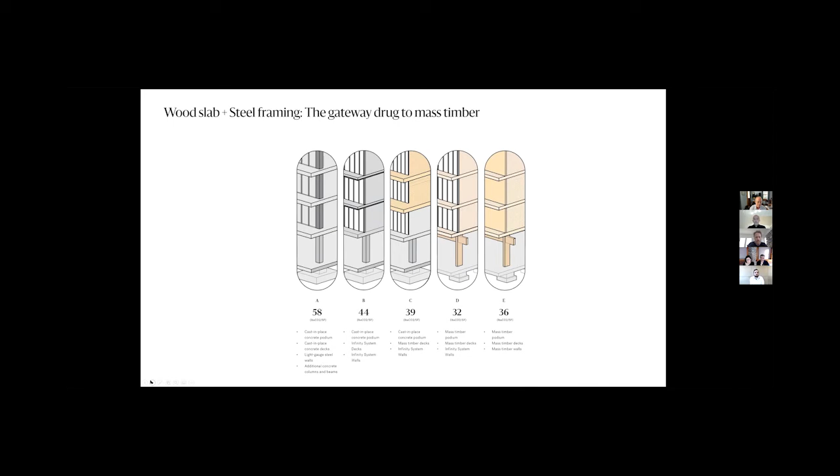There we go. So to make this a little easier for folks to explore, we've developed a set of tools. We've developed a tool called Timber Tool. This is Jake Albrecht's work, and you can go use this today. And what it lets you try is, what if the frame is steel? What if the frame is wood? What if the columns are wood and the frame is steel, and so on? And then what if I use different CLT thicknesses? And then you can manipulate it and look at it. It will develop the optimal geometry, but then you can explore what the different geometries are.

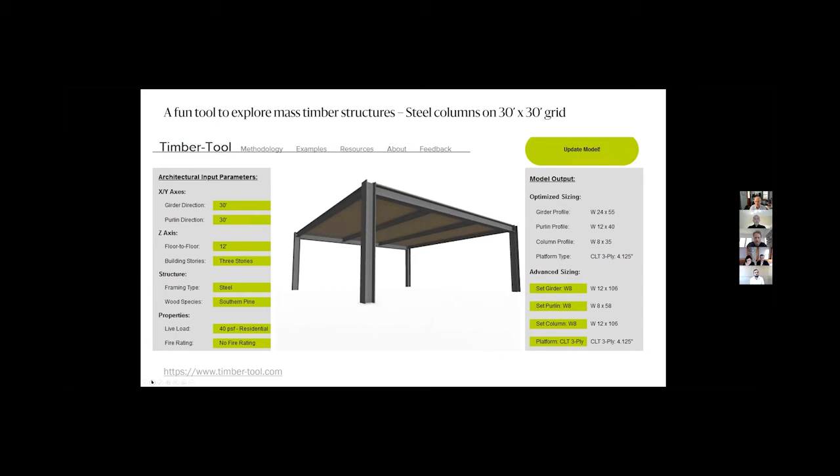Let's see if I can get to the next page here. Yes. So with that, I'm going to back up and hand it over to my colleague, Mike Johnson. Great. Hello, can everybody hear me well? It seems to be okay, good. Go ahead, Mike, and just say next slide when you're ready.

Next. Coming. And so you'll see the site plan on the next slide, which I guess it went too far. I'm trying to keep up with a very slow advance right now. Some internet challenge.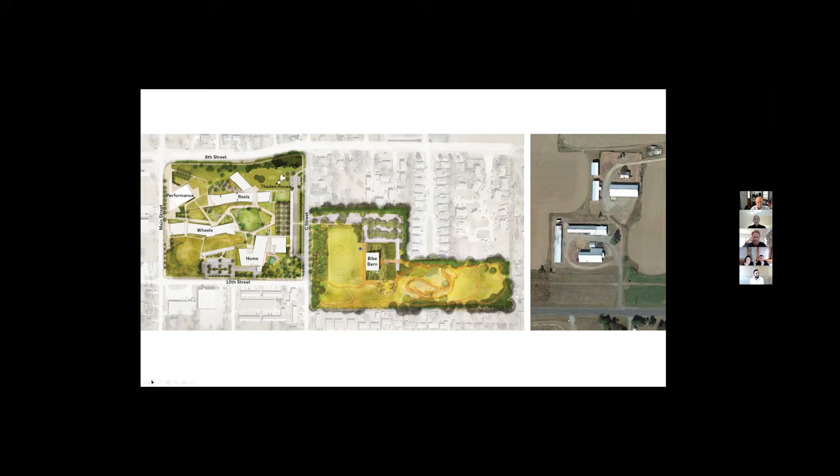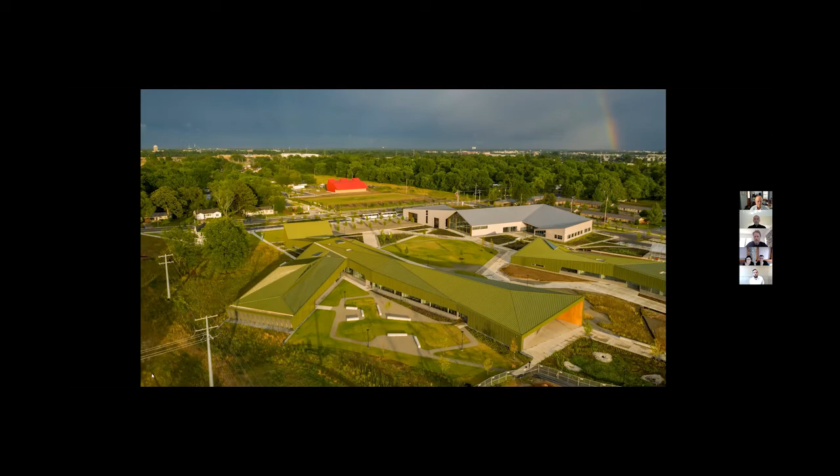So yeah, this is the home building. It's like 30,000 square feet, $220 a square foot, which is pretty good. And the campus EUI is 22, which I think is 70% less than baseline. Next. Similar to what Jonathan Tate was saying, this is a completely stick-built building out of typical 2x6 and prefabricated trusses. And even though we tried to make a very simple form with flat roof surfaces, the wood trusses actually get pretty complicated and complex and unique in shapes inside, but that wasn't really a problem.

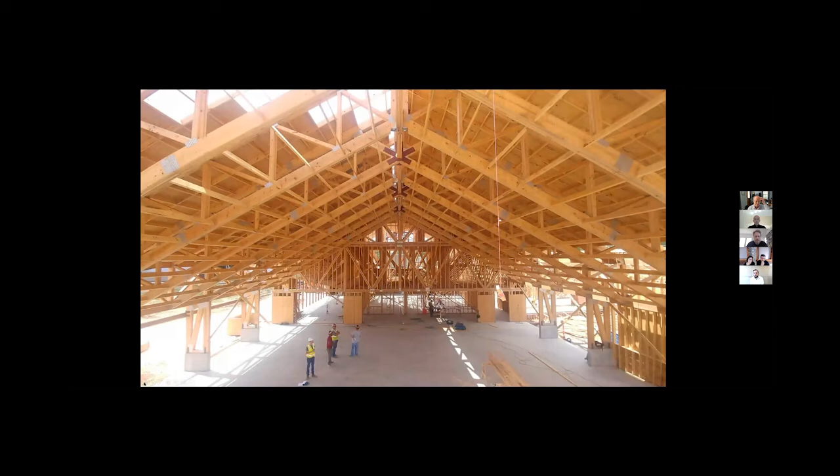As I said before, it's all dimensional lumber, except we did use a little bit of glulam, as you can see in that image. It was 5 glulam columns, and we tried to use the architecture as a lesson for the students by exposing the structure, using a lot of wood, and just showing this is a wood building. And even the columns are designed at the minimum size. So the middle one's the widest, and the shortest one is the thinnest. So the students could even learn material efficiency and structural engineering. Next.

You can see here it's a massive amount of wood. So we used wood for a number of reasons, but one of the main reasons is carbon sequestration and reducing global warming. And it was also less expensive than steel, which would have typically been used here. This is a very large building to be stick built, and it just barely fits into the category of Type 5 construction. But if code allows and mass timber is cost prohibitive, this can be a great alternative to mass timber. Next.

You can see this is kind of like the porch environments that we have, and these portals that go through all the buildings on campus that frame the other pieces of architecture. In the picture on the right, we're seeing some more exposed wood finishes that we have on the exterior and interior. The rest of the facade, as you see on the left, is fiber cement board, which also has cellulose fibers in it, and we use cellulose insulation. So there's a lot of carbon being sequestered in this building.

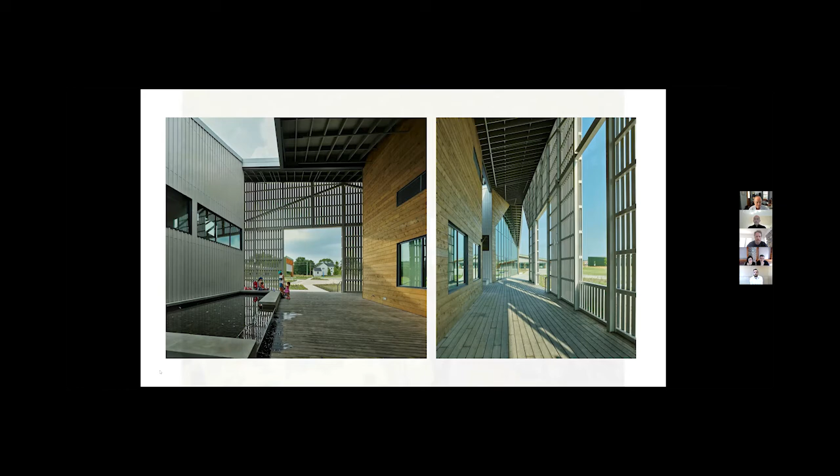This is a building section showing that 78-foot span truss, which is actually two trusses that are L-shaped that meet in the center at a large girder truss. So they're coming up from the ground on the side and coming across and somewhat cantilevering and meeting at the center. Next.

So yeah, this was the home building. I don't have much more to say. There's one thing. This building, like most buildings built today, is built very well. So hopefully it'll last over 100 years. And it's all mechanically fastened, so it's somewhat designed for disassembly. And so I'm hoping in the future we're better at disassembling buildings and reusing them, like we talked about on the last project. And so not only can we sequester this carbon for over 100 years, but maybe even longer than that if we reuse the wood.

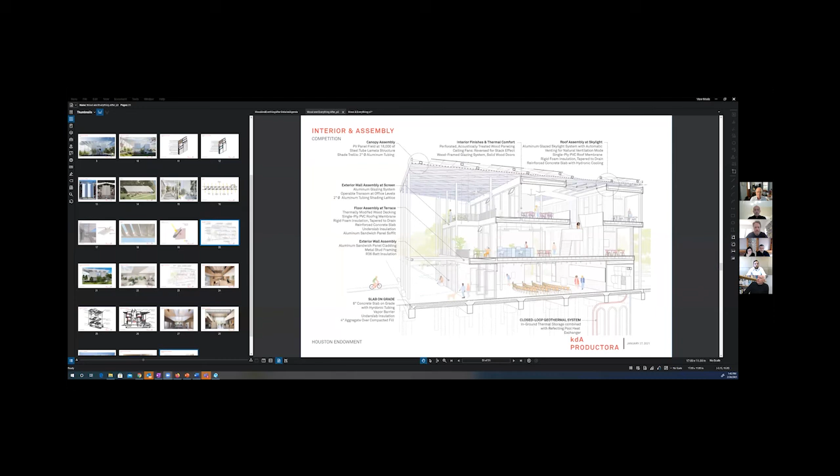It reinforces some of the points that Z was making, that in fact cross-laminated timber and mass timber as hybrid structures are starting to become cost neutral and cost comparative to other systems. So this is a project we won in a competition. There was a huge urgency to maintain the integrity of the competition proposal. And it's a competition that we worked on with Productora in Mexico City. As we worked on it, it became clear that it was a far more ambitious program in the competition than they could afford to build. As you know, we started schematic design, and COVID started.

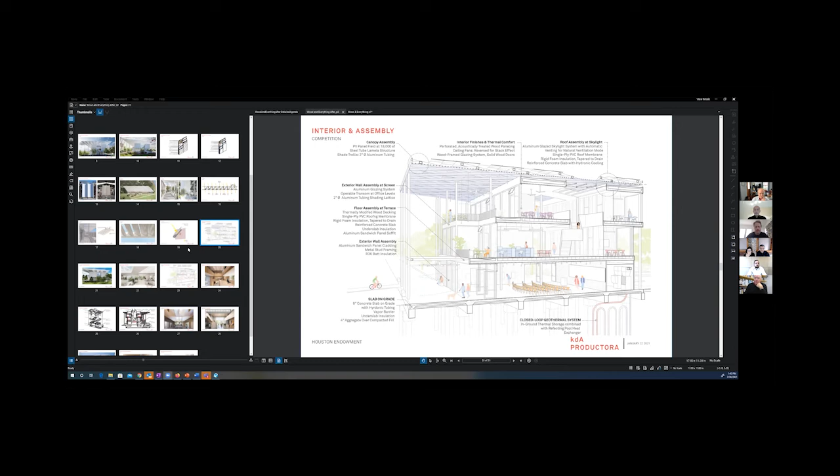This is in Houston. The bottom fell out of the oil market, and really it's been one crisis after another since then. But the competition was a 3-story building. As we moved our way through it, we challenged some of the basic competition programming. And these were interior views. And as we looked at it more closely, we worked on this with Transsolar.

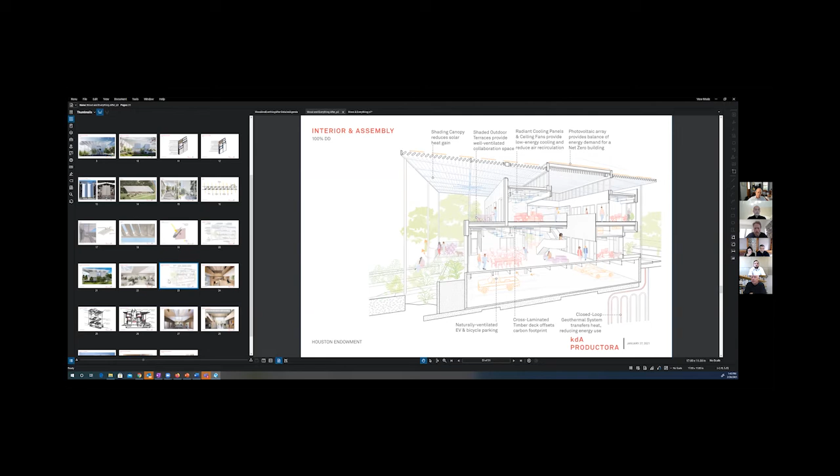We were expecting to use a concrete frame building, concrete columns and slabs and shear walls, primarily for the thermal mass in Houston to stabilize the overall temperature of the building. And concrete proved to be very expensive. And as we continued work on the project, we really started looking at ways of integrating cross-laminated timber as the horizontal framing system.

Our experience in this, I think, is that it's now a mature technology and a mature subcontractor pool. The construction managers went through a selection process and selected Nordic from Quebec as the fabricator. They'll provide both the steel and the CLT for the project.

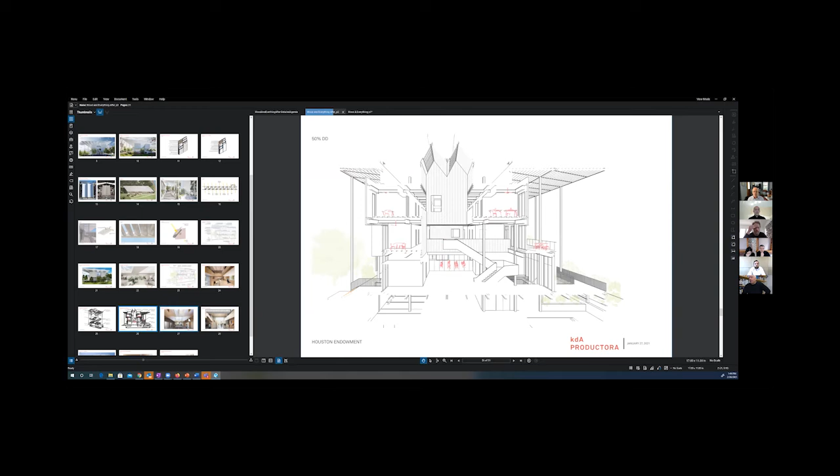And as we started to revise the design, the CLT is actually quite flexible. And it really is the steel detailing that was a much more considerable architectural challenge as we move forward. And I think the project really benefited in some ways from the transition to this material. It gave us an opportunity to really simplify interior finishes and unify the interior and the framing system as we move forward.

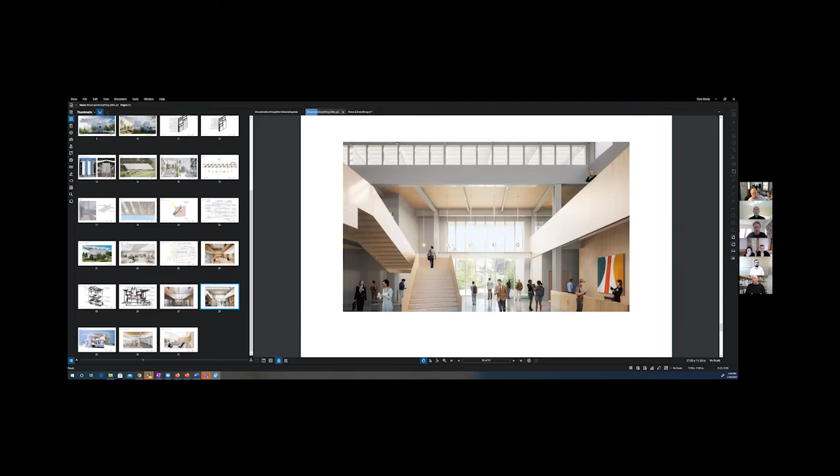And in some ways that's been our experience with cross-laminated timber, that it's really turned into a system that has gone from being an experimental system to one with a mature market presence. And within that, it really has turned into a matter of optimizing the potential of that system. I think one of the real challenges in this project and a lot of CLT projects is to optimize overall span and material thickness. And I think that's the current status of this project.

So, to our surprise, mass timber as a solution turned out to be beyond cost competitive. It solved a series of objectives within the project.